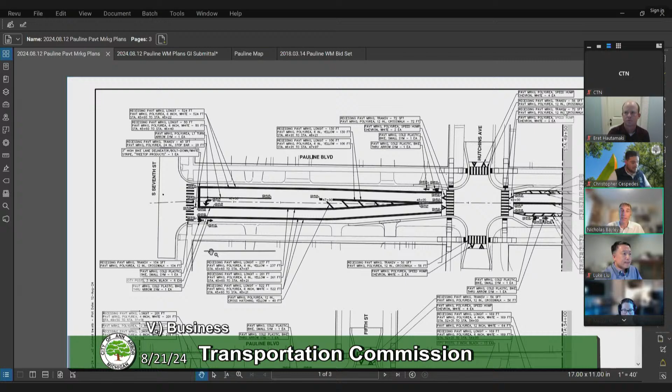So Nicholas. Well, thank you. Yes, so I'm going to pull up the pavement marking plan, which I hope is also in your package. So the plan that we have here, this is a plan that we prepared for what's called a GI submittal, which is part of the federal system for obtaining Act 51 money, which is one of the funding sources of the project. And so these plans were submitted last week as part of that, and then we are considering them as 80% plans. So we have a feel relatively for what we're trying to do, but it's not final. So to start us off, these are the pavement marking plans.

We're at 7th and Pauline, so we're going to be going eastward. We are maintaining that left-hand turn lane that's out there now, and we will have a dedicated bike lane on both the north and south side.

As we get closer to Hutchins, this is going to be a raised intersection, similar to what we've recently done at Granger, where the ramps come up. I guess it's a little bit different than the one at Granger in that the pedestrian area is going to be raised.

And so that's what we're going to do at Hutchins, and we will have bike lanes on both sides. This will, when we go further east, introduce the 3-foot clear separation, protecting the bike lanes. And we'll also have parking starting on the south side at the park.

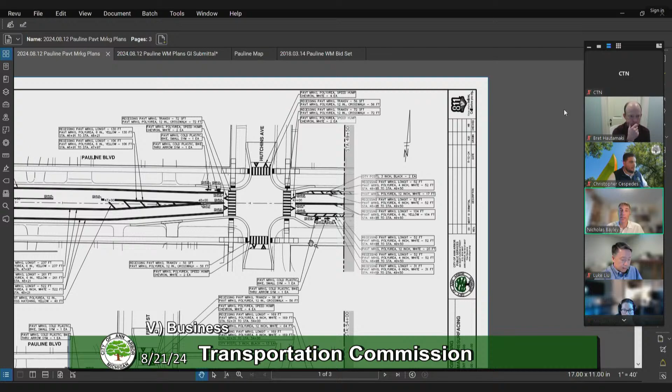That cross section will remain, but one thing I should point out is on the north side, we will be having city posts, the black ones, following through the project, starting from Hutchins, going all the way down to Main Street.

So we'll have parking, we'll have the bike lane, the offset, two 10-foot lanes, another clear offset, and another bike lane. When we come up to 5th Street, we're going to remove the parking by extending the Allmendinger driveway approach.

And we'll have a bump out at 5th. That'll be a little bit on the east side, it'll be narrower, it'll be reduced from what we have now. I guess it'd be wider than we currently have.

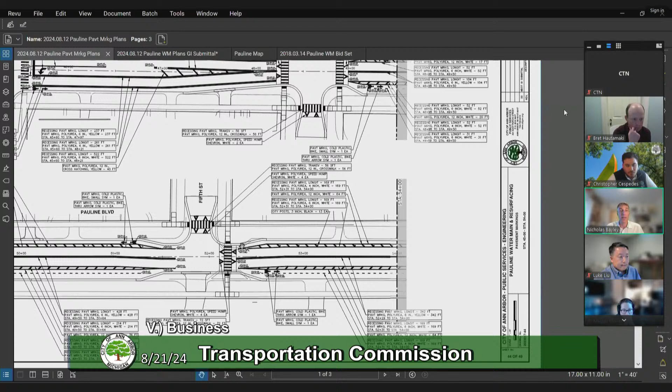You kind of see that in the gray lines in the background. That's what we currently have, whereas this line here represents what we will have or intend to have through the narrowing and the bump out.

Then we continue along. This one will also be raised. I suppose we go back a little bit—this pedestrian crossing will be raised, as well as the one on 5th.

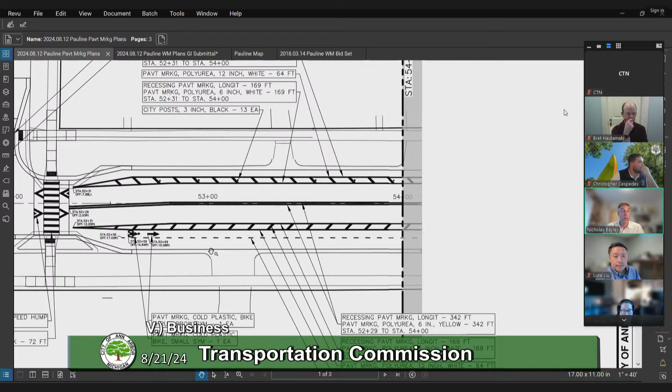Here we carry along. We'll have parking along the south side, no parking on the north side, and offsets, bike lane. Next page here.

That should bring us up to Edgewood. Here at Edgewood, we're going to again drop the parking area.

We're going to narrow up the total cross section of the road between the two curb lines with the bump out. It's going to help define all the different uses and minimize the pedestrian crossing distance.

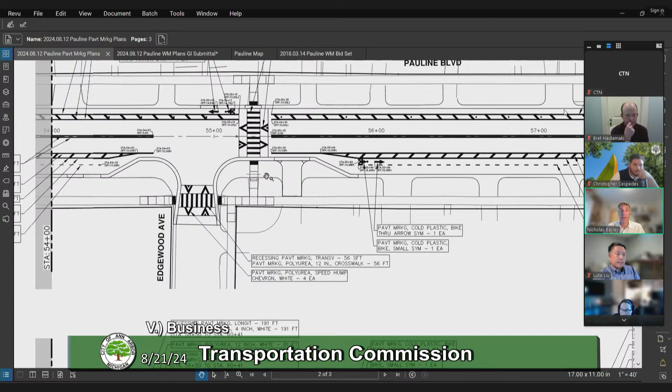We will maintain the bike lane and the 3-foot strip through that side. This residential driveway will be extended through the bump out.

And then when we get past that, we're going to go back to a parking, bike lane, offset with two 10-foot lanes, offset and bike lane.

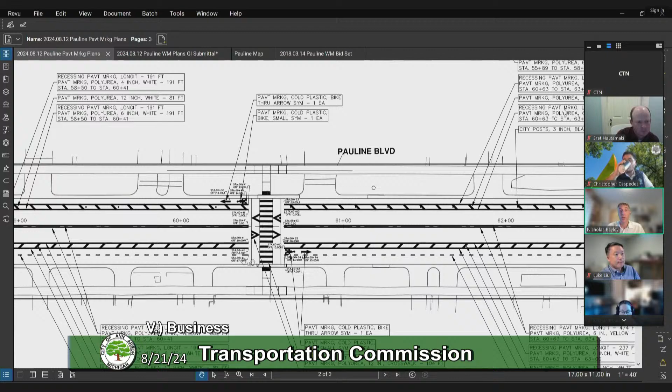That will bring us to the next one, continuing in an eastward direction. We're going to introduce a mid-block pedestrian crossing. This provides two different benefits.

Now that we only have parking on the one side, the south side, we know that there's going to be more people who will need to cross the street. This gives them that ability.

It will also be a raised pedestrian crossing, so it will also work as a traffic calming method, in that as vehicles approach, it's going to be raised so that they slow down.

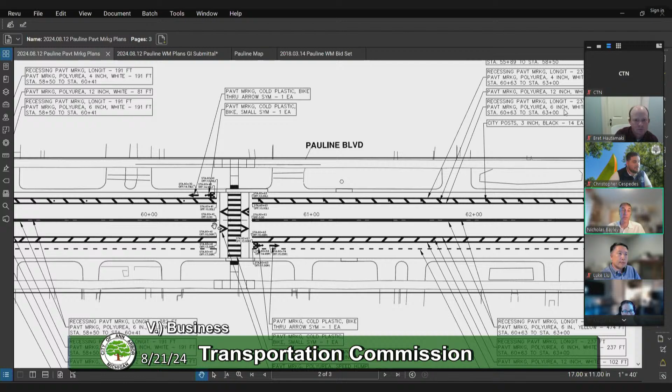That's pretty much the same through here. And then on the last sheet,

we have a speed table or speed hump about halfway between the mid-block crossing and the intersection at Main. And it will look like this.

Continue the parking through, and then we will drop the parking, continue the bike lane. That'll allow for a dedicated right turn lane, and this will be a through and left turn lane, and then we'll have the existing configuration on the other side with a dedicated bike lane.

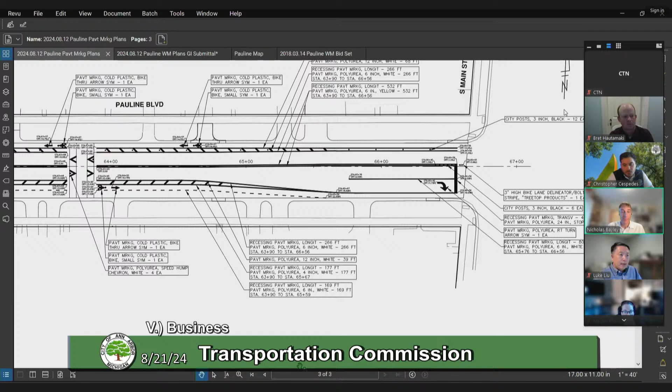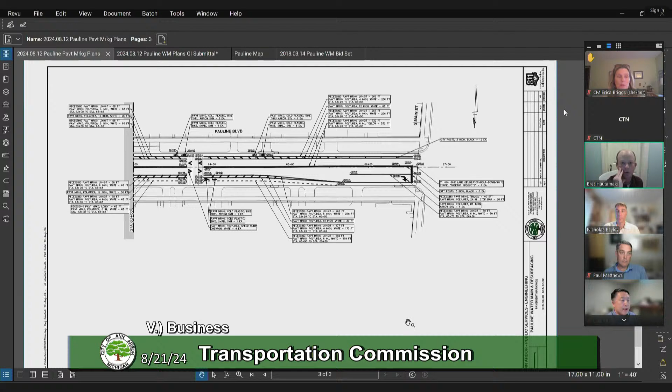And Erica? Okay, all right, any other comments or questions?

I'm sure the design team will take back all of the comments here tonight, but the vote that we're going to have here will be about removing the parking on one side of the street. So any other comments before we take the vote about the parking removal?

Peter. I don't know how to register my disapproval other than with a no vote. And I don't want to vote against removing parking and putting in bike lanes, but that's kind of what I feel like I'm going to do.

I mean, do you guys want to come back with a different design that doesn't have people in the door zone? Then we'll vote on it then.

Well, Nick Hutchinson's here, I'll let him make that decision. Again, either design is going to require the removal of parking, and as Bret mentioned, this is just to do the removal of parking so that we can do either one of those things. We'll take the feedback, we'll look at it, and we'll consider what to do. But this isn't a vote on the design, so I'm not sure what else to say there.

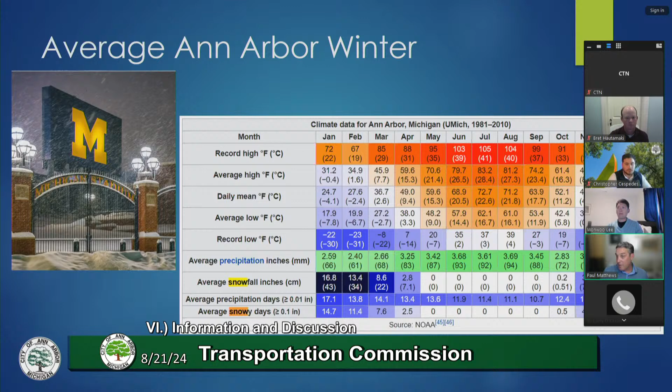In an average Ann Arbor winter, we expect about 53 days with snow coming down or on the ground, and about 58 inches of snow. Last winter was one of our most mild — we had 31 inches of snow, and 22 inches of that came in January, along with a whole bunch of rain and a polar vortex mixed in. So we had an interesting January, but for the most part, last winter was pretty quiet.

Our winter maintenance goal is to maintain the roadway system so it's safe to use at reasonable speeds, and that definition differs depending on the road type. For a major road, we're always looking to get down to bare pavement — it won't always be bare pavement, but that's our goal. Once those are bare, we move into our local roads, where most people would say a reasonable speed is a lot lower, since we're just using local roads to get home, not as a cut-through or travel area. So our maintenance goal is to make sure roads are safe for reasonable speeds, depending on the road type.

For our winter road maintenance, all these different colors on the map represent roads that we maintain all the way down to bare pavement, no matter how much snow we get. We always maintain these to bare pavement prior to doing any maintenance on our local roads.

We have 8 snow routes, so a normal little Michigan snow that just makes everything slippery will probably only have 8 trucks on the road at one time. We're treating 346 lane miles every single time it snows down to bare pavement, which is like going to Chicago and back. That's how much pavement we're treating to bare pavement.

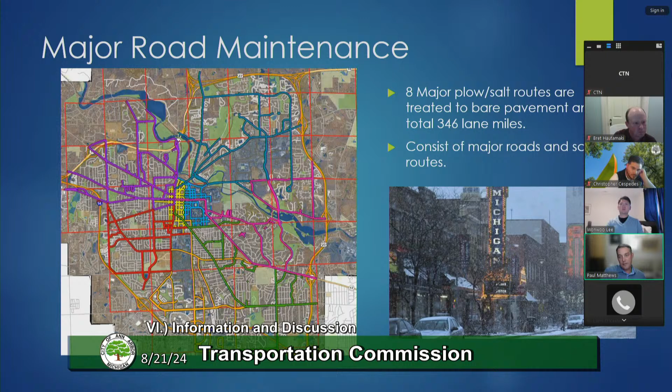This is primarily our major roads, major thoroughfares, because they have the most pedestrian traffic. Many have bike lanes, higher speeds, and just require more maintenance. We also have school routes mixed in there, and those are locations where we do pretty much a loop to get the most people from the major roads or connector streets within a neighborhood into a school, making it safe in the areas where those schools are.

Then from there, we have our local roads. We have 23 routes that we plow, and over 500 lane miles to clear once that happens. We usually start to get some staff into local roads right when it starts or stops snowing, but you've got to remember we still have 8 routes, 346 miles, that we get down to bare pavement before those other assets move into neighborhoods. Usually in a large snow event, those 8 routes would have 16 to 20 drivers just working on the main routes before we can even put staff into our local roads.

Earlier I said we have 16 employees in the street, so we've already maxed out and we're already borrowing employees from other work areas. We put our staff on a 24-hour operation the minute we get a larger event, and typically our staff will work anywhere from 48 to 72 hours when we have a larger snow event of 3 inches or more, just to get everything to bare pavement on majors and local roads so that everything's been plowed curb to curb once.

In our local roads, we say that once it stops snowing, we will have plowed through your neighborhood within a 24-hour period. So you're not going to see bare pavement, but we will have made sure that we've plowed streets open within that first 24 hours after the last flake falls. From there, we continuously touch them up, going through and salting our hills, intersections, and curves. That continues to happen after a main event. For any normal, smaller snow, we run through all of our locations in neighborhoods and salt intersections, hills, and curves.

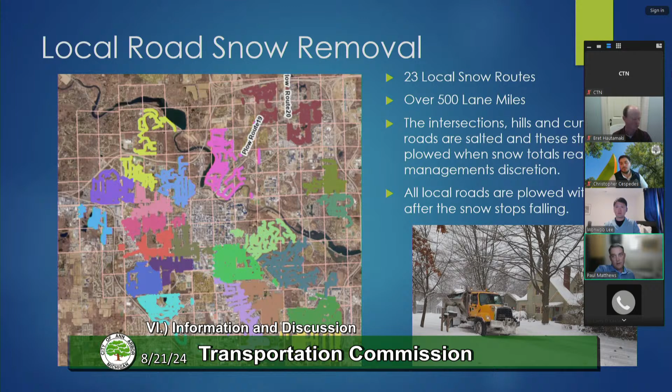We also have our bike lane maintenance, the 13.2 miles of buffered protected bike lanes that we already have. We currently deploy one streets driver, and that takes approximately 12 hours for a 3 to 4 inch snowfall to clean those up completely and get them salted down to bare pavement. We also have 90.2 miles of on-street bike lanes that we treat with our plowing operations. Those we typically have to go back and plow open again, once contractors are done working on the sides of roads, since we have a lot of additional work to do there because the way our salting equipment is set up, it's set up for road maintenance.

Fortunately, council approved some new equipment for us last year and again this year, which will give us updated snow plowing equipment that puts us really to where we should be today. We'll have some larger plows, some wing plows, and the ability to plow wider. Our newer salt spreading equipment will have the ability to put salt and brine right up against the curb where a biker drives, which currently we do not have, because our equipment is set up just for roads and it's set up to put salt on the left-hand side of a truck.

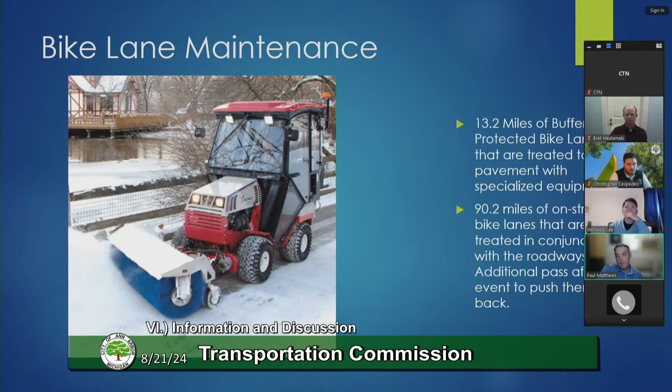So it's very hard for us to clear that curb lane on those unprotected bike lanes with our current setup. It takes a lot more effort for us to clear that right edge on these unprotected lanes than it currently does, just because you don't have traffic driving over it, spreading the salt and warming the pavement back up. We then have a mixture of sidewalks, paths, and refuge islands. All of these lines, it's kind of hard to see on this computer, but everywhere you see a color, that's somewhere a parks employee maintains a sidewalk, a pedestrian area, or what we call a refuge island, which are small islands out in the middle of a street.

So those require special equipment or many times just a hand route service by one of our employees to go take care of those. So 14 miles of those sidewalks and paths are funded by the right-of-way, so they don't actually belong in a park, but the park staff maintains those 14 miles.

And then there are 66 pedestrian islands as of last year. I know we're currently building some new roundabouts. Every time we build one of those, any roundabout has 4 new spots where someone has to go out and work by hand. Any pedestrian island is the same thing. One person has to go clean that out by hand, or any of the bump outs. So all the pedestrian features that we put in do currently come with a cost, and they take extra time for an employee to maintain and work on.

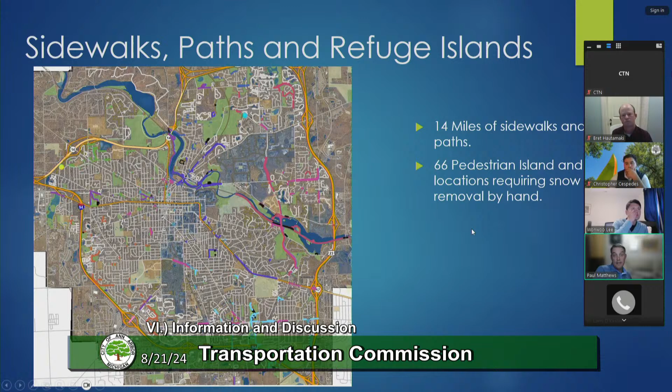We have right-of-way sidewalks. Residential property owners are responsible for the property in front and on the side. With that, they have to clean any bus stop, any handicap ramp, and their mailboxes, and they have to do that within 24 hours of the end of a snowfall. Our non-residential property owners are responsible for clearing all the snow that's accumulated prior to 6 a.m. off of their sidewalk and adjacent to their properties before noon on that same day.

The city provides a free salt and sand mixture to its residents. We also have a newer setup called the A2 Snow Match program, which looks to connect volunteers with residents that are unable to clear their snow. That's a newer program that the city put into place. And then all of this is enforced by our community standards department, which is our police department.

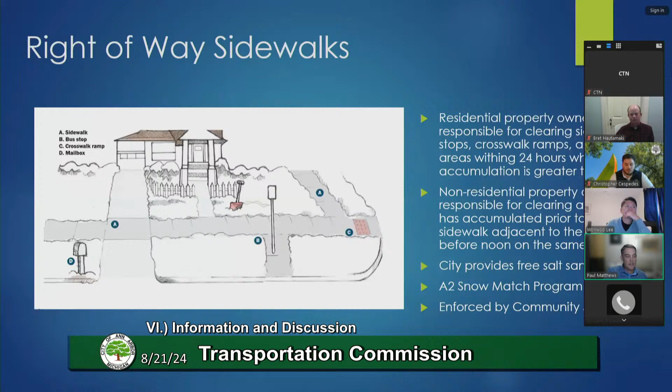Some of the things we do to treat roads prior to an event: we have the ability to put down brine prior to an event, but our current equipment that we own now is very small, so we only do select areas. What that does is allow us to pre-treat an area so that we don't get bonding, so when we go back to work on a storm, hopefully that snow is not stuck to the pavement when we get there.

A lot of that depends on how cold the snow comes in. When it comes in cold, it's great because brine works like it's supposed to, but when it comes in wet and starts as rain, it can wash everything away, so you're not treating at those times. We've seen the last couple of years a lot of wet storms come in, which is why we had a lot of the tree damage. This year we're predicted to be cold and snowy, so we'll expect to start pre-treating.

We're always watching the weather as it comes in. We have traffic cameras out, monitoring pavement, looking to harness AI so it knows when snow is falling and sees weather patterns coming in, to alert people and take some of the guesswork out of the equation. We also utilize specialized weather services with cameras in 2 different places that predict when we'll have snow that hits the pavement, based on the temperature, the dew point, and the weather patterns coming in. So we're always looking to be ahead, to be prepared, to do the best job possible on roads.

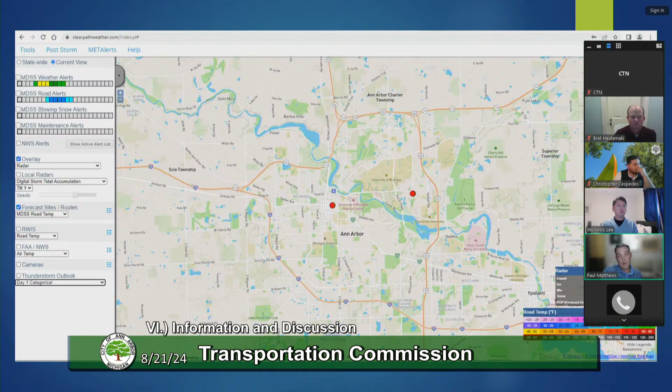Most of the time we're out way ahead of an event. Anytime it's going to freeze rain, we're putting down granular out ahead. Prior to snow, same thing. We're arriving an hour before we need to be here so that we can make sure our roads are safe and our most critical roadways have treatment when they need it. We also have a plow and spreader activity map that we put out to the public. This is getting revamped this year because we have a new AVL system, which has a lot of functionality we don't have now. We look to show people when we've been there, when we're going to be there, and where they are next.

We plow our local roads around our solid waste collections. So if your solid waste collection is tomorrow, we're not plowing you until last. We're starting in locations with the next day's solid waste, and we work our way back so that our solid waste people the next day are good, because we know you came home from work and put your solid waste container out already, even though it's snowing and we need to plow.

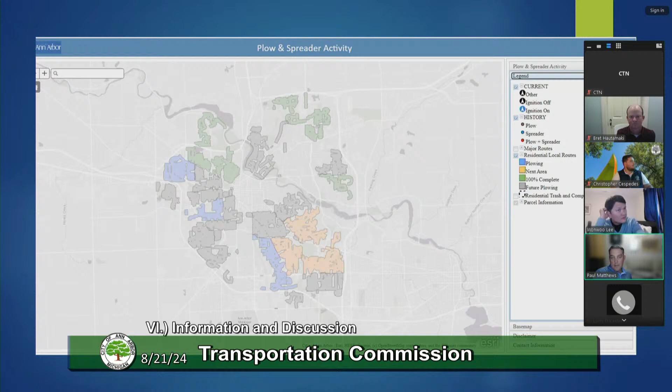So we skip your area so we do not knock all of your cans over. That's kind of the way we do our local roads. And like I say, we're working on showing exactly when we've been through a route on our new system, and we'll show how many passes we made on that street. Those are some of the things that are coming your way.

We have limited resources in our budgets. The same budget that resurfaces your roads is also what we utilize for snow maintenance or any public works maintenance on any roadway. So we know we're challenged on our resources, and we work to spend those resources the best way possible.

Our equipment currently is challenged. Like I say, we were fortunate enough to get a bunch of it upgraded, and I expect that we'll be able to clear greater areas, put salt and material where we want it. We'll be able to pre-treat all of our major road routes earlier in a snow event with increased liquids, the ability to burn off ice pack when we get it in the future, because we'll be carrying liquids that we can't currently carry now.

Our weather patterns have been really strange. Like I said, when a snowstorm comes in as rain, turns into wet snow, and you get about 8 inches of it, and then a polar vortex comes in behind it and gives you single digit weather, and it hard packs and binds in the neighborhoods. Like we had the one storm last year that took several days of plowing 24 hours a day and salting it to get it to come off of the roadway.

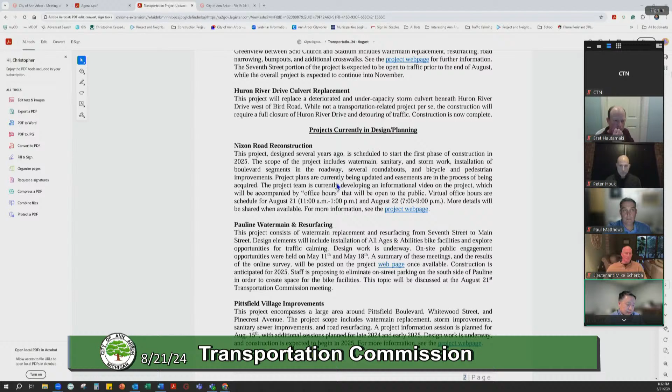Next, moving on to the category of projects currently in design or planning. For Nixon Road reconstruction, this one includes installation of boulevard segments in the roadway, several roundabouts, and bicycle and pedestrian improvements.

Virtual office hours - there was one for today, and there's another one for tomorrow. The time for the virtual office hour tomorrow is between 7 and 9 p.m.

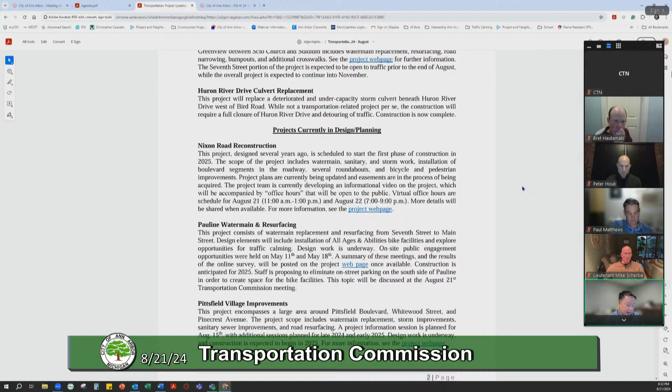We have just discussed the Pauline water main and resurfacing project.

Moving on to Pittsfield Village improvements, this includes a large area around Pittsfield Boulevard, Whitewood Street, and Pinecrest Avenue. The scope includes water main replacement, storm improvements, sanitary sewer improvements, and road resurfacing. There was a project information session earlier this month, and there will be additional sessions later this year and in early 2025. Design work is underway, and construction is scheduled to begin in 2025.

Moving on to other updates and information. State trunk line jurisdiction transfer evaluation - there has been a resolution directing the city administrator to negotiate with MDOT about the transfer of ownership to the city. That resolution was passed by council on August 8th, and staff is currently making internal preparations for the negotiation.

The Detroit to Ann Arbor connected and autonomous vehicle corridor - the first segment of the pilot is along I-94 between Rawsonville and Belleville. This first segment was launched in July of this year.